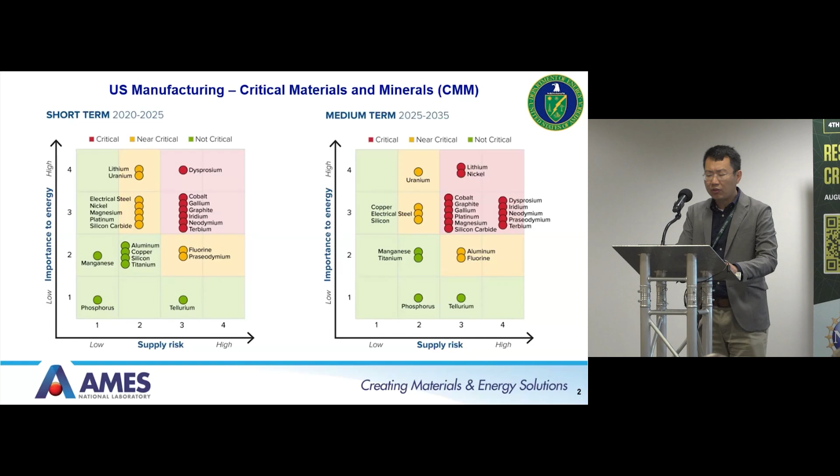So I still want to start my slides with this figure. I guess people in this room have seen this many times, but every time I see this, I see increasing demands of new materials and larger volumes of materials for even medium-term applications. That's only like 10 years from now, right? Looking at the different kinds of minerals we need, even magnesium. I would never imagine magnesium would be a critical mineral. So what happens 20 or 30 years from now, especially thinking about carbon neutrality by 2050?

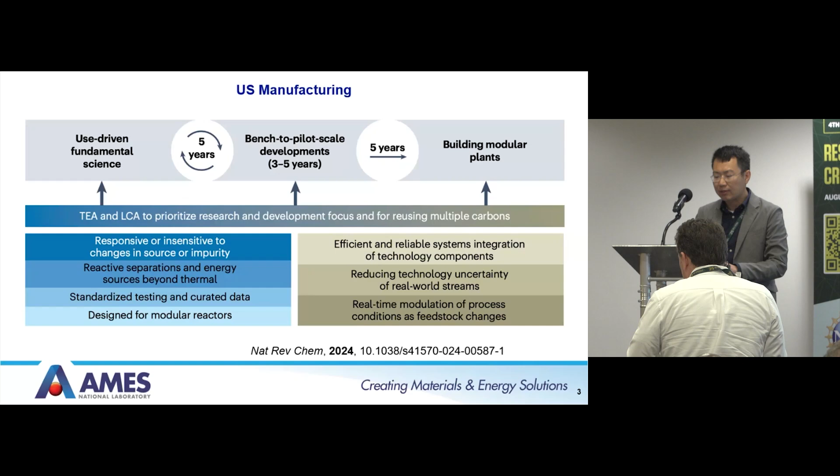To really achieve the production of critical minerals at scale, we have been thinking about taking a very aggressive timeline. For every new technology, we need to spend 10 years only to get it from fundamental research to modular plants. That means 5 years for use-driven fundamental science, another 3 to 5 years for bench to pilot scale development, and another 2 to 3 years to build modular plants. Otherwise, we do not see any other way to really make an impact by 2050 for carbon neutrality applications, which is the key focus of the Department of Energy at the moment.

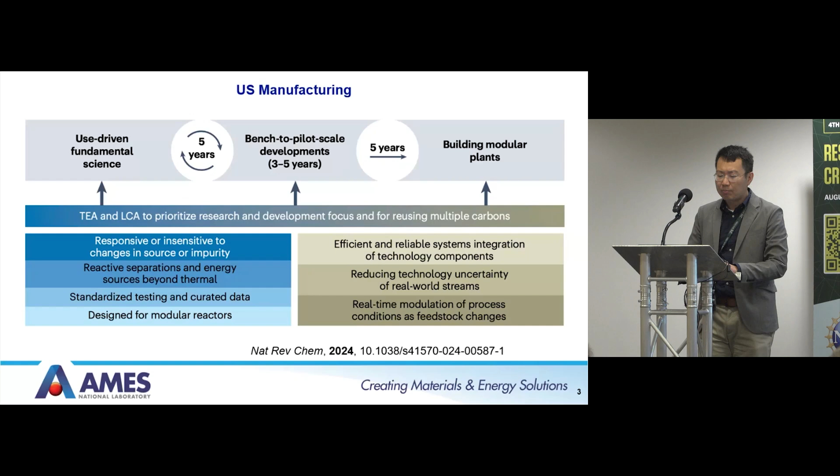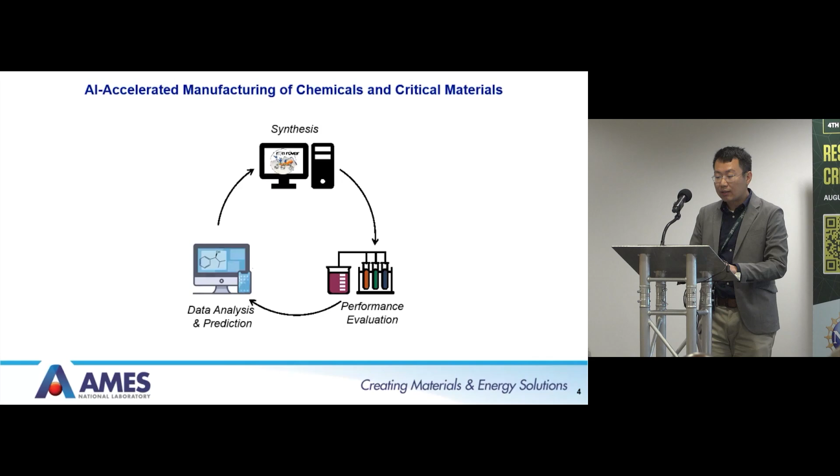Think about how we really manufacture chemicals and critical materials, especially for fundamental science or lab scale demonstrations. You have to start with something, synthesize a molecule, if you want to do solvent extraction or hydrometallurgy. And then you have to test them. I have a new, emerging feedstock with low concentration, or a new composition that people have never worked with. Then you have to look at how they perform. Once you get data, you use human intelligence to think about how that information can be processed and compiled, and then generate new hypotheses for better synthesis.

So we have been thinking about how to accelerate this life cycle. How can we use automation to achieve automated synthesis, especially using AI to guide the synthesis? Then we can use high-throughput evaluation to quickly evaluate the system. We get more data points than anybody else, more than what humans can normally do. We collect that data, use AI to predict new molecules, and use that information to guide the automated synthesis again until we reach the optimal goal. I will go through all three parts of this life cycle.

The first part is automated synthesis. At Ames Lab, we have been working on new software and new algorithm development. We can automate reactors, pretty much most of the ones used for chemical synthesis, and then use AI to guide the optimization. So this will be unmanned, fully automated, on-the-fly optimization of reactions. This is a software called Reaction Rover. And then we can use optimization algorithms, such as active machine learning, to do this kind of optimization.

You can either collect data in batch mode, letting students, staff, scientists, and technicians collect the data and feed it into the algorithm, or you can use on-the-fly, fully unmanned, closed-loop optimization to achieve these goals. Different processes have different kinds of data, but we can still do synthesis, and we can also do separation, using algorithms to guide the benchmarking of the optimization process. Our goal is to create a toolbox that's robust and easy to use by experimentalists who are not familiar with programming, like myself. Even as the leader of this project, I do not do coding.

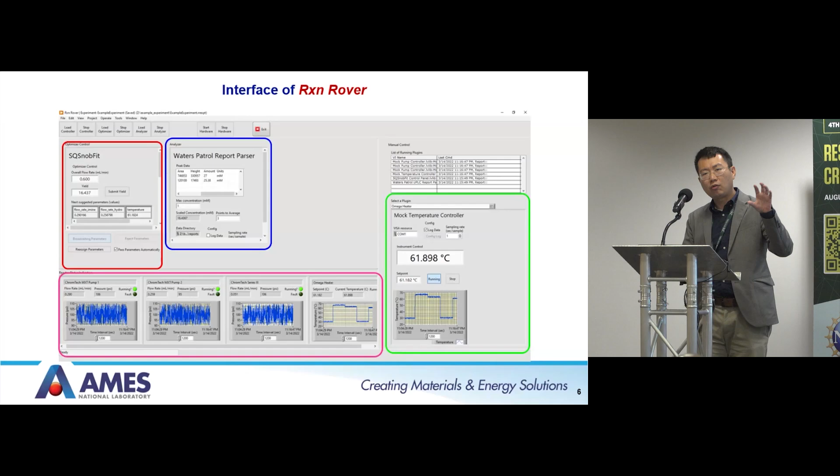On the right, you can also do manual control. Sometimes, if I have to do an experiment in the evening, I just remote control the computer and access everything. I even have a camera pointing to the hardware. I know exactly what's going on. So these are the equipment that we have built. We have built different kinds of hardware for different kinds of concentration, different types of applications, right? For lower temperature applications, higher temperature applications, and how to use those for different kinds of ligand synthesis. Eventually, we think we can also do continuous flow separation studies.

So here is an example of the reactions. I will not torture you with the chemistry here. I'm saying that this is an important reaction for doing ligand synthesis. So within 48 hours, we collect about 180 data points. And the optimal condition was achieved within 20 hours. So that means we can most likely optimize every single chemical reaction within 1 day, right? So this is far smarter than doing manual optimization, which takes more training and other stuff, right?

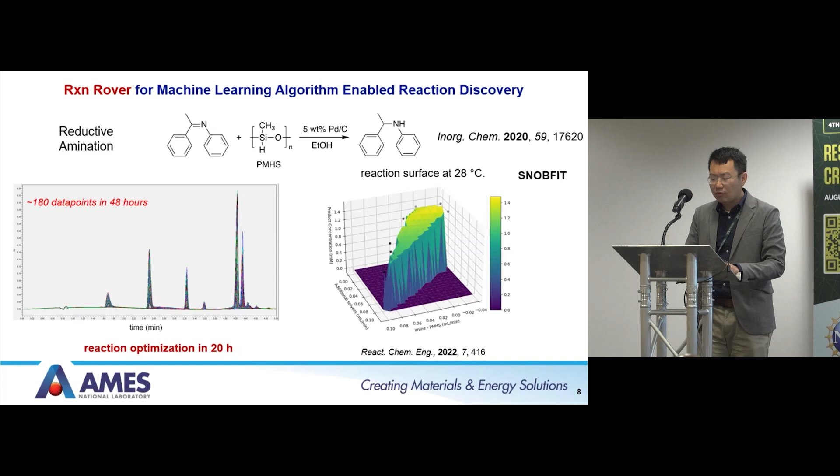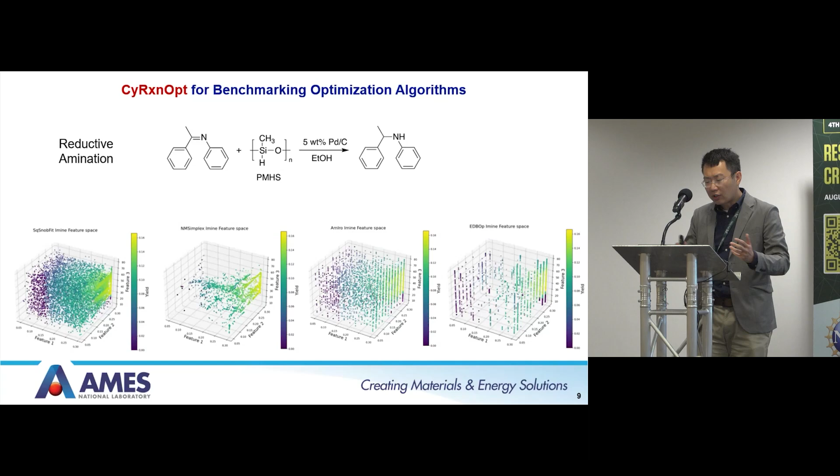So on the right, we can also do further data mining, right? Understand what's really going on for this reaction optimization. So basically once we collect 200, 300 data points, we can use AI to analyze data. So we understand exactly how AI can probe these kinds of reactions. I call this artificial intelligence directed evolution of chemical reactions, right? We imagine that in the future, all these kinds of jobs can be delegated to AIs instead of torturing us to think about how to optimize reactions in the lab.

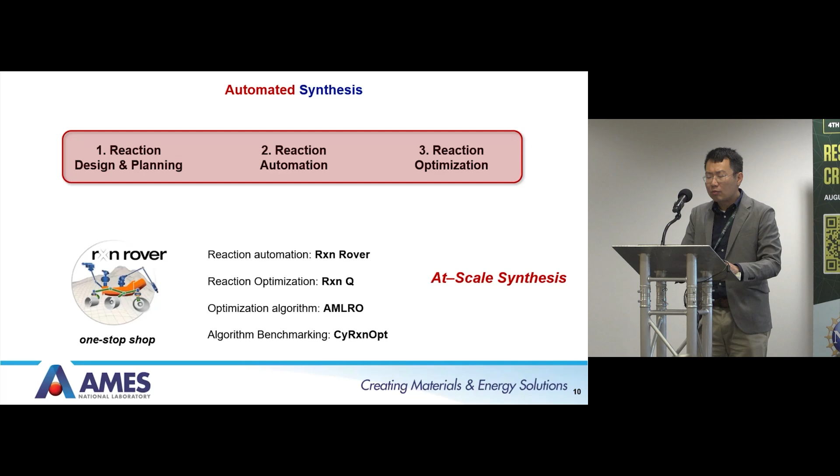So overall, I have mentioned different kinds of applications using automation, reaction optimizations, different kinds of AI algorithms to do reaction optimizations or even separation studies. So Reaction Rover is almost like a one-stop shop for everything. So it can really be used for lab applications or even in research labs in industry. Going from there, it's very important that we have to make chemicals, right? Not just milligram level. We have to consider making like 10 grams or above, right?

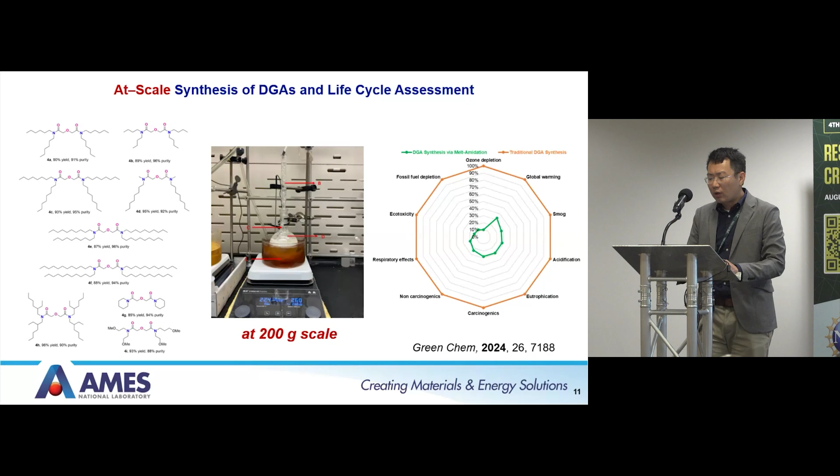For example, in this case, we have been doing the synthesis of this molecule called diglycolamides at 200 gram scale. So this is very important to do the further optimization studies, right? I will show you in a second. On the right, you see this spider chart. So this compares the life cycle assessment of the new synthesis that we have conducted compared to the state of the art. So it shows that we're far more environmentally benign compared to the existing technology.

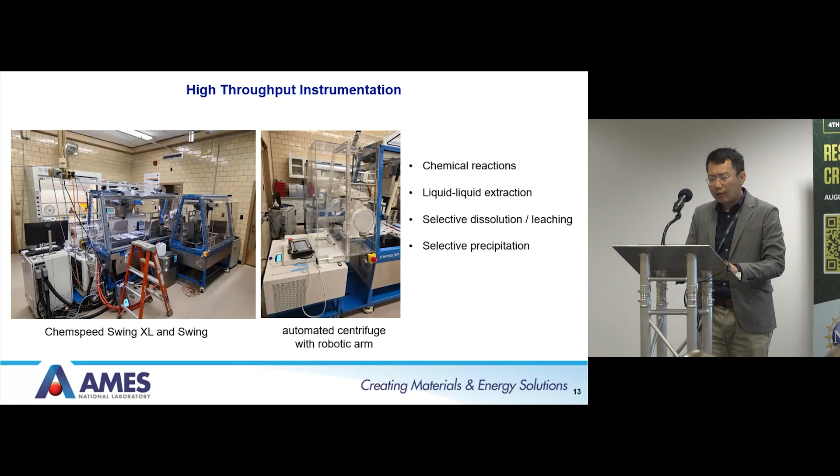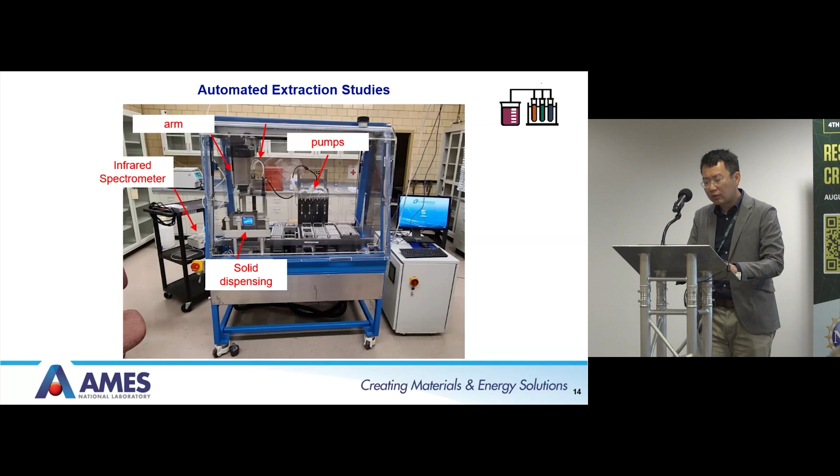With this, you can see that we have the arm hanging on the top, and then you have the pumps that deliver the liquid. There's a needle head at the back of the arm that can deliver liquid or transfer liquid from one port to another. You can do solid dispensing as well. You can deliver the ores or pure compounds or ligands, prepare solutions one way or another.

So here is the example, how does this work? I think this is moving. Okay, so now you can see that the needle head is picked up by the robotic arm. It moves, rotates, finds out where you want to transfer the liquids from, and then picks up the liquid, and once it's ready, it will lift up and then move to the next position. So this is about a 1 minute long video.

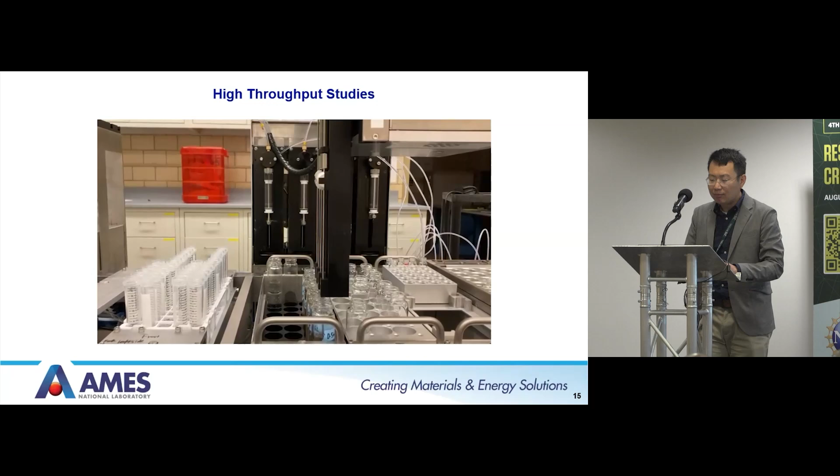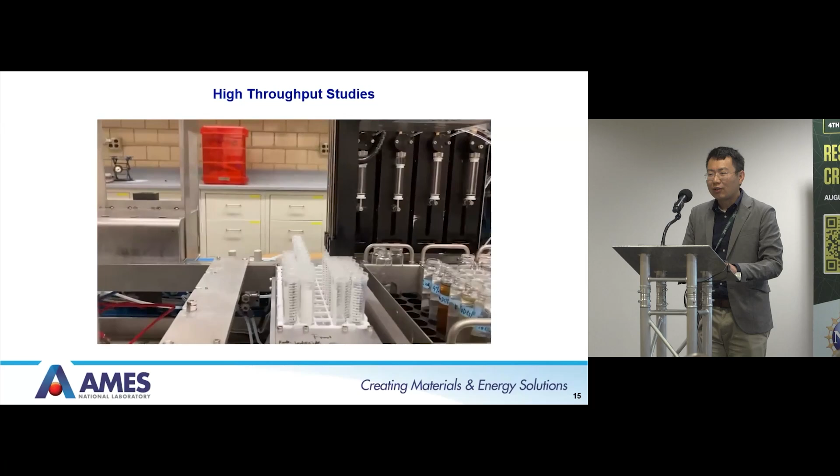Unfortunately, I have no way to control it from my side. In the lab, you can hear how this sounds. And then once it's ready, it will move the... I would think this is very futuristic. I used to stare at this for a long time, thinking about how it works and how it could replace my job in the future, right?

And then after it delivered, it will move it back to the original position and then be ready for the next job. And so this can go on and on 24 hours nonstop, right? And then it will move back to its original position.

All right. So with this, we can do all kinds of hydrometallurgy reaction condition optimization. We can do solvent composition, acid concentration, acid type, different types of extractant, and also do extraction studies or stripping studies. It would be prohibitive to go through everything in a very time-sensitive fashion otherwise. I think we can achieve about 200 extraction studies within 2-3 days and get all the ICP results to know exactly what's going on. And with this, we developed a new workflow to do extraction of heavy rare earths and stripping of light rare earth elements. This is work just published recently.

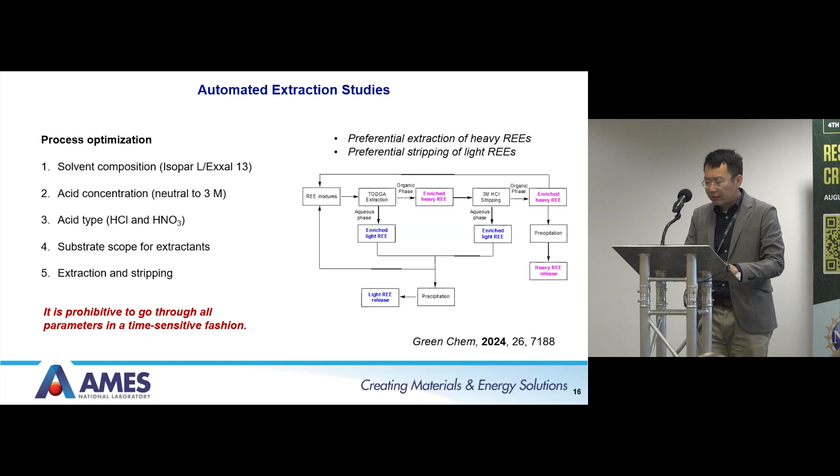In the end, the last piece is the AI prediction part. Once we get all these results from the high-throughput evaluation, my team member, Marilu Perez, uses all the data to do prediction. She can predict exactly what the binding structure should be, and in the future, we hope to design the alkyl chains and other types of secondary coordination environment to help further design the molecule. And then the molecule can be synthesized in the automated synthesis again.

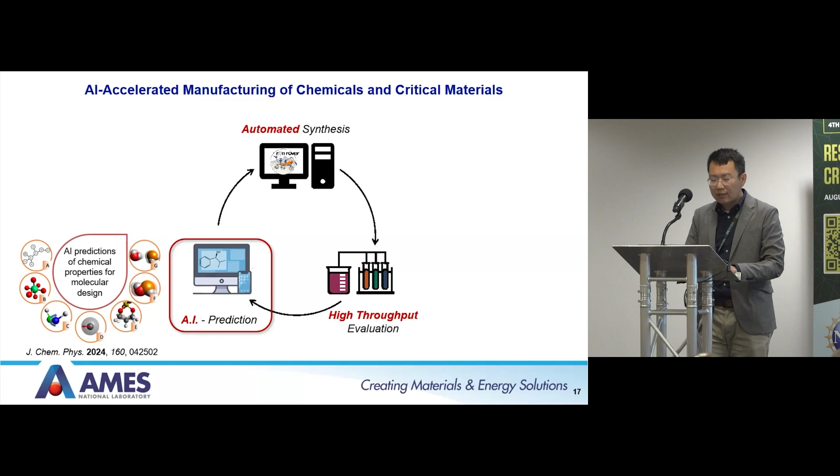So this is the workflow we have conducted. You can see all the different parts we put together in the last 3 years. We even got industrial support to continue this work. It's really making an impact in industry. I hope to bridge with more industries through this meeting and after this.

In the end, I will conclude that this is not a means to have fewer human beings in the lab. It's actually to really magnify the power of our brains in the lab. So we do think that we still need more and more talented people in the lab who will be behind the scenes, making sure everything is working properly and getting to the goals that we need for 2050.